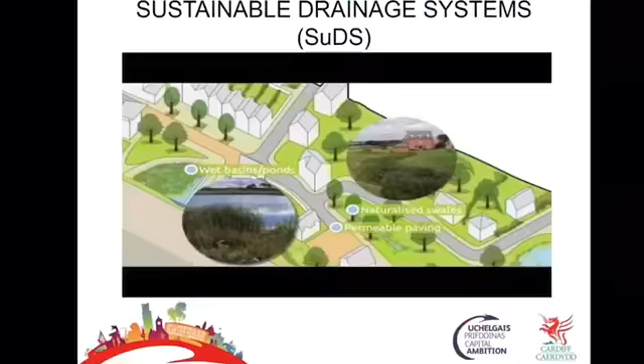Just to explain, I'm a drainage engineer in Cardiff Council. I'm now also a SAB officer, SuDS Approval Body officer, so all applications that trigger SAB legislation in Wales in Cardiff come through me or one or two other colleagues. Because I've got a drainage background, I tend to take on the bigger projects. Here we are. I think I've just jumped 1 or 2 pages.

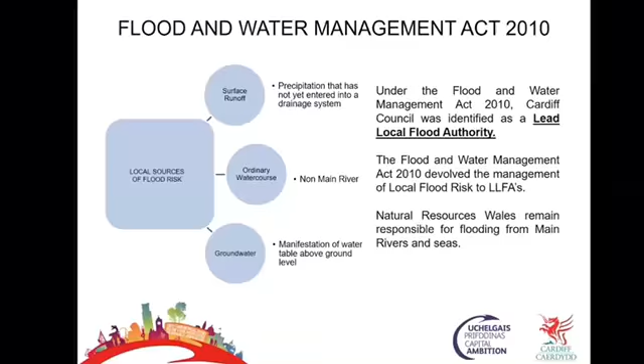Flood and Water Management Act 2010, Schedule 3. As of January 7th last year, we've all been pretty busy in Wales in local authorities. 25 SABs, all councils and 3 national parks. Many are already aware of this. It is a steep learning curve, I think, is a way of phrasing it.

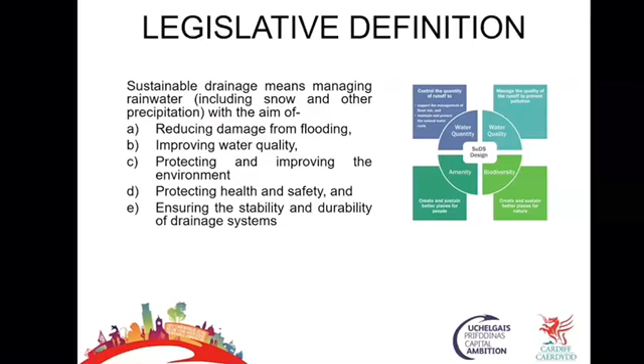Again, legislative definition based on the 4 pillars of SuDS design: reducing flooding, improving quality, delivering amenity, delivering biodiversity, and also ensuring that there's maintenance, ownership, and adoption of the actual facilities. Probably one of the more challenging elements of what we're trying to deal with.

Implementation of Schedule 3, as you say, started last year. Started very quietly, actually. Very few applications in the first 6 months. It's busier now than it was at that time. I think a lot of people were unsure about how the legislation worked, how it would be delivered in each local authority. Very much like planning authorities, there's different interpretation of the legislation. So you probably won't find 2 local authorities doing the same thing.

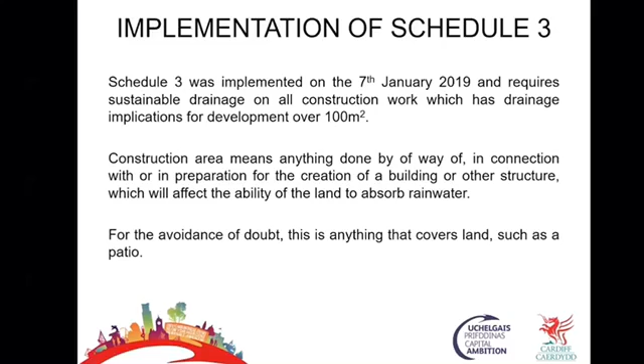What I'll be talking about today is how we're approaching the legislation in Cardiff. It might vary from some other local authorities, but we try and be consistent with the legislation and also try to be reasonable with each application.

What is a SAB? SuDS Approval Body. Basically, it's about 5 of us in Cardiff working in drainage, design and implementation, and any application over 100 square metres where the runoff characteristics have changed within a construction site triggers SAB. It might not be from soft to hard engineering, it's just how the surface water runoff changes, and it has to be over 100 square metres. There are a few exceptions, not many. Trunk roads, Network Rail, some agricultural buildings. Outside that, it catches SAB.

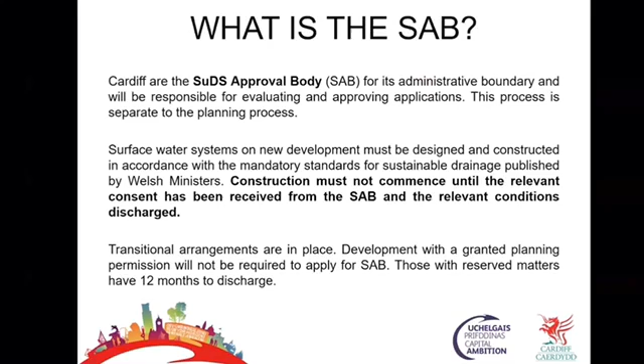The 6 standards were previously mentioned, based on 12 principles. Looking at all these, from my perspective, the most important thing is, have you got an outlet, and what's the difference in level between the invert of your outlet and your finished ground level? That depth, that hydraulic depth, is where all the magic happens. Where the cleansing goes, where the attenuation goes. The bigger that depth, the more you've got to play with.

And the simple rule of thumb is, the longer you keep it on the surface, the cheaper it is. The more you go into ground, particularly on a brownfield site, the more expensive it gets. The one bit of advice we always give to people is get in early, because that's when it's easier and cheaper and quicker to do a design.

One I've got crossed out here, it is in the legislation. Rainwater harvesting tanks. If you've got a high use rate and you're working 7 days a week, go for it. Otherwise, in Cardiff, we don't insist on these, because in reality, you probably won't even make the money back in a year for the maintenance it costs to run one of these things. There isn't a massive rainwater shortage in the area, so maybe that's less of a priority for us.

But at the moment, we can't allow rainwater harvesting tanks to be included as part of attenuation. We have to assume it's full when it rains. So it's a nice thing for BREEAM standards, but unless you have a lot of brown water, grey water use, we don't insist on it. And we certainly wouldn't include it as part of any attenuation figures.

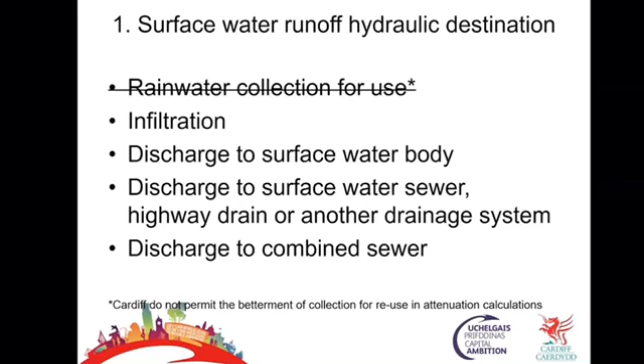Then infiltration, discharge to surface water body, discharge to surface water sewer or highway drain. Final one, discharge to combined sewer. Infiltration in Cardiff, difficult.

That's an important element. 1 in 100 year plus 40% for climate change. That's all about exacerbation of flood risk. In certain instances, I wouldn't insist on that as the SAB officer because the definition is, does it exacerbate flood risk? If, for instance, it went into a water area where there was controlled water, such as the River Taff or into Cardiff Bay, I might consider a lower standard because there's no flood risk downstream.

So again, that's how approaching Cardiff is about being flexible, consistent on the standards, but flexible with each individual site, because it's very, very important. I can't overemphasize this. If a SAB does its job properly, then you get a better design. Don't think it's going to delay things or cost more money. Generally, it speeds things up because there's no drainage conditions in planning. It makes things quicker. And if you get enough on a pre-application, more often than not, it's a little cheaper as well.

So there's an urban myth about SuDS that it takes longer and costs more, only if you get your design wrong. It's really, really important to get in with us early and don't fix the design before you come to us, because that's when it all goes wrong. That's when you start retrofitting with SuDS. That's when it gets expensive.

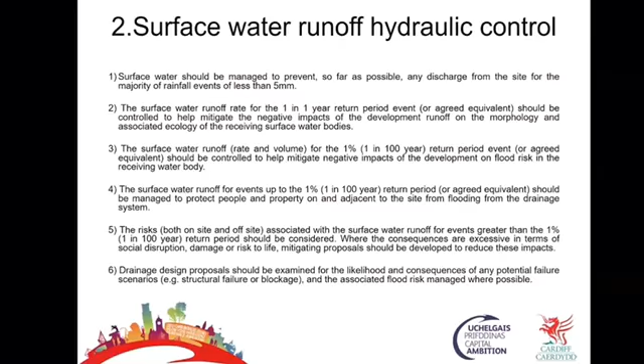Hydraulic control, nature of development, greenfield or brownfield. There is a bit of a let off on a brownfield site. If you've got a brownfield site where the drainage is still working effectively and it's going to the same outlet, we would consider a 30% improvement on that runoff rather than a really, really tight controlled runoff. That is something in the legislation that gives flexibility on brownfield sites. It's not all that common, to be honest, because usually the systems are defunct. So therefore, we consider it as a greenfield site. But it can occasionally happen. And if it does, we'll help developers with that.

Controlling the rate and volume. Often we look at Q-bar. We are starting to reduce the flows going into combined systems now to less than 5 litres a second. We used to have a minimum of 5 in Cardiff. We go down to 2 or 3 now, if it's the only option. The reason being, it's very unlikely to block if you've got an orifice plate that's been filtered through a SuDS system. The likelihood of blockage and maintenance is far reduced. So we are happy to reduce the flow going into the system, knowing that in reality it's unlikely to get blocked. So that's why we've reduced it, and it's something the Water Authority are happy with.

Exceedance flows are really important. If that system overflows, where's the water going? We had floods in Cardiff recently in a housing estate built after the war. The water went straight through 20, 30 houses. It was surface water flooding, no water courses, no rivers, straight rainfall. No systems failed. The reality was they weren't designed for climate change. And that's a problem across the whole of Wales. And we're going to be using SuDS in the next couple of years to try and protect those houses. So where the exceedance flow goes is very, very important.

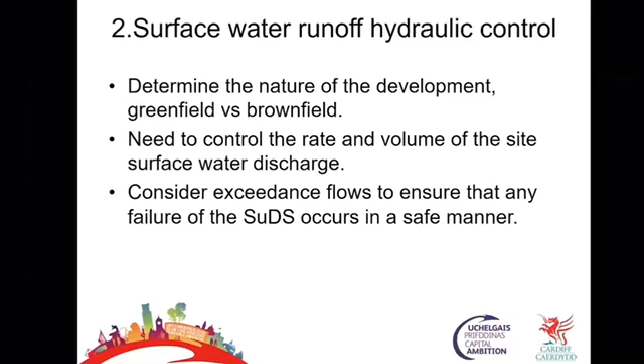Water quality. This is something that's changed in terms of legislation. The SuDS Manual simple index is what we use in terms of simple scoring for what systems you can use in terms of treatment. It's all about highway runoff. 95% of pollution off any site is highway. Roof pollution is easy to deal with. Footpath pollution is easy to deal with. All the pollutants, hydrocarbons, suspended solids, metals, they're all off the highway. How you deal with that and how you maintain dealing with that is really, really important. That's always the area I look for in terms of quality.

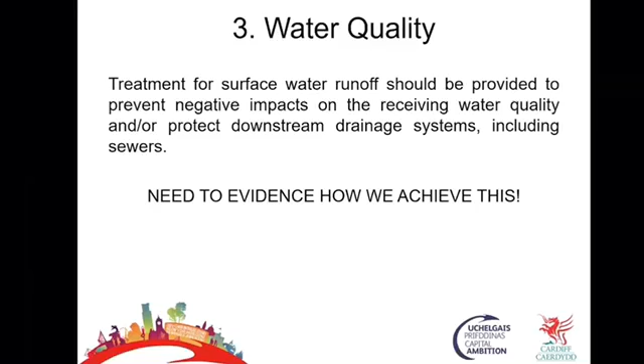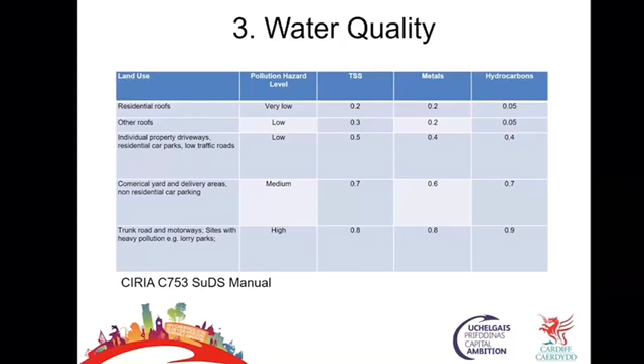This is what I mentioned earlier, the simple index, the scoring. You can find it in the SuDS Manual. We recommend this to everyone and everyone uses it. It's a very simple, easy to understand method of actually managing quality. Gullies are scored 0 here. I kind of agree and disagree with Susdrain on that.

Don't tell Paul Shaffer I said that.

But you can use gullies as part of a SuDS system. So if you had a gully as a silt trap before going into a rain garden, then going into a subsurface box such as Permavoid, etc., we'd be happy with that, because what that would do is hold the heavy solids before it goes into the rain garden. Reduces your maintenance costs.

Have a standard highway gully design, so highways department are happy to clean them out. That's where you would use gullies as part of a SUDS system, where they are very useful. It's about keeping the maintenance low. If the maintenance is high, it won't be maintained. And if we have a SUDS application, SAB application where maintenance is high, I won't pass it. I won't let them build it because I know it won't be maintained.

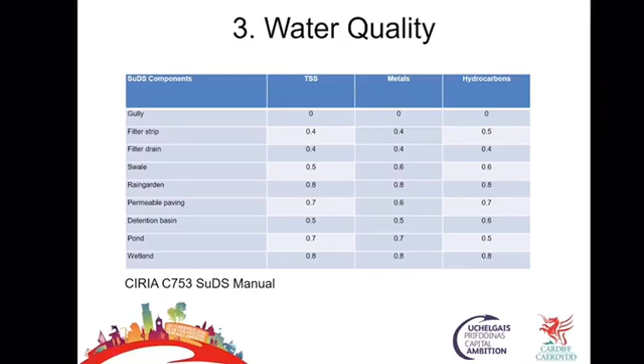Amenity. Very broad definition on amenity. I was telling a colleague yesterday we had a SAB application for a new blast furnace at a steelworks, so you get all sorts. And I did toy with the idea of putting in a rain garden next to the blast furnace. You could have a look when it's working, but I thought probably not. So what we did there, we looked at the overall sites that the applicant owned, and we looked at work we could do away from the application where the construction was going to take place. So it was almost like offset SUDS.

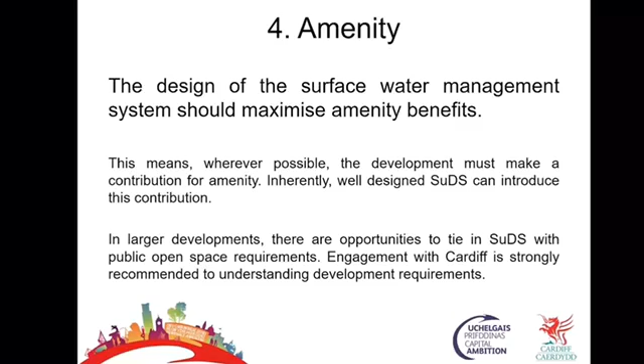So we found out where they sat down and had their lunch away from the blast furnace, created an amenity area there with biodiversity. That's how we were enabled to give SAB approval, and I think we met all the 6 standards. You know, you've got to be reasonable and realistic with what each site can offer. Sometimes it might be offset, but it's got to relate to the sites in question.

Biodiversity, again, this is an area that I'm still learning as an engineer. You have to look at what's there before and what's there after, and it has to be enhanced biodiversity in terms of before and after. That could be trees, but often simple things like reseeding pollinators. You know, a grass bank is monoculture. It doesn't offer a lot.

If you put a much more biodiverse mix of seeds, you can offer a lot more for not a lot of money. And when you're looking at reseeding pollinators, you're looking at really rubbish soil with lots of stones in it. And maintenance, again, is very, very little. It's something councils are learning at the moment in terms of road verges. So certainly biodiversity is an expanding area, but it doesn't have to be expensive.

And combine it with the quality, combine it with the amenity. If you put them all together, it means you're going to keep your development density and meet the 6 standards. If you do them separately, you're wasting space. And I will help developers sometimes to combine those so they can have a more successful development, because you're meeting the standards and it's about better design.

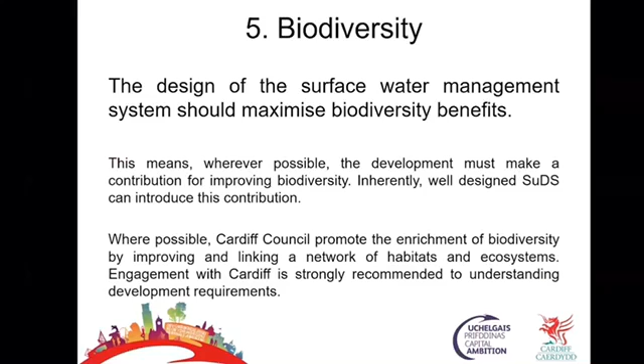Design for construction, operation and maintenance. This is work in progress, I think is how I best describe it. Generally, we have a mandatory obligation to adopt in certain circumstances as a SAB. Often what we find is there'll be a single curtilage, a private developer will take on the maintenance personally, and we'd agree the maintenance schedule and the design. We could adopt, and we are looking at commuted sums in those situations. For small developments, that can be challenging.

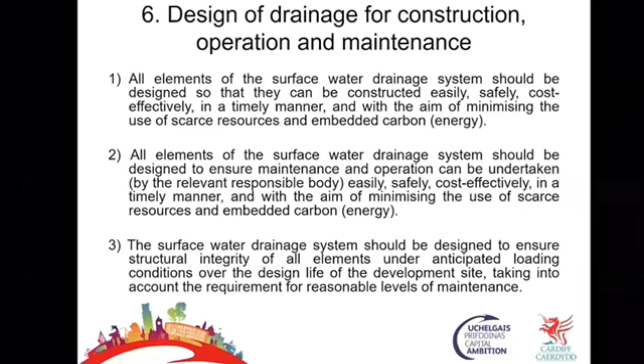For larger developments, often we look at the options for private management companies. Again, that's politically challenging for many local authorities. So that's something we're going through as an authority at the moment, and I know different authorities have different approaches. But the most important thing of all is to get design right, to make sure that maintenance is minimised. That's very, very important. To flick through quickly, the 6 standards again.

Duty to adopt, as I mentioned earlier, we are considering non-performance bonds, because if everything goes wrong as a SAB, we may have to pick up the bill. We can't afford that. We have to make sure we're covered as a SAB on behalf of the local authority. Inspection fees, we will be charging. We will be inspecting when installations take place, and we will be inspecting after as well. That's our role and responsibility. Something that doesn't happen at the moment prior to SAB, and it's always been a concern for us from the drainage section.

Commuted sums and management companies, that can vary between local authorities, and I think it's good to have the flexibility there, because I think it offers the options. It's a political issue for many local authorities, and I think the flexibility is important.

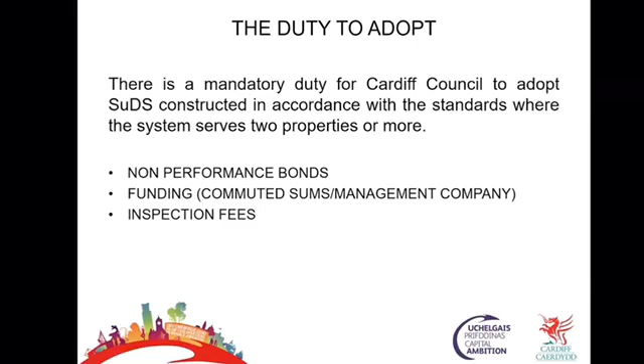So that's why we've got to be careful as a SAB in terms of any decisions we make. I think we've got to be seen to be reasonable to try and avoid these situations. But at the end of the day, we do have powers to enforce, up to the ultimate of turning it back to the original site conditions, which we don't want to do, but we can and will if we have to. If some applicants completely ignore what we say and completely ignore the statutory legislation, we will act on it in Cardiff, because we have to, because we're the capital city and we've got a responsibility. So hopefully you never get to that situation, because no one wins in that situation.

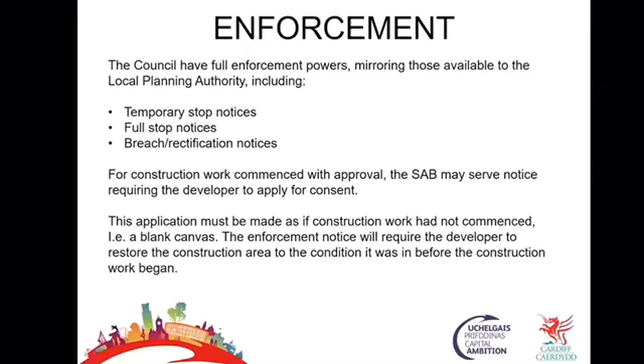And then what I generally do is have a few more conversations after that pre-app meeting, prior to them putting the SAB application in, to be sure there are absolutely no problems, and any tweaks we have to make would be minor and wouldn't affect the SAB application. But the most important thing is to get in early. Don't come to me with a fixed design that's already gone into planning. That's an absolute nightmare, because I have to come in with a retrofit design, and there's a really good chance it won't pass SAB and it won't get built, and it'll have to go to planning again under a new application. I really want to avoid that. It does happen, unfortunately, but hopefully less and less as the more people understand what the legislation means in Wales.

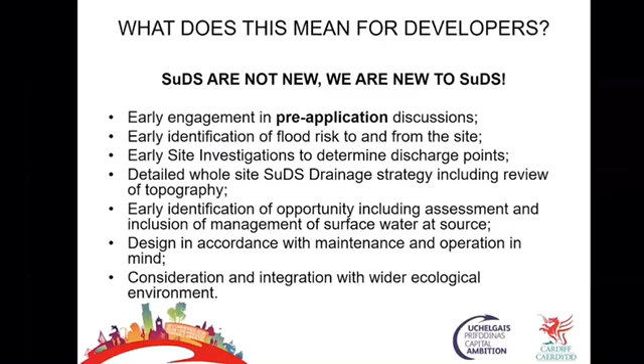It's the hardest one to deliver because Mother Nature decides where and when it falls. But more often than not, it's done at the end instead of the beginning. This legislation is all about doing surface water at the beginning rather than at the end of the development. It's as simple as that, and don't make it more complicated than it is. It just makes lives easier and leads to better design.

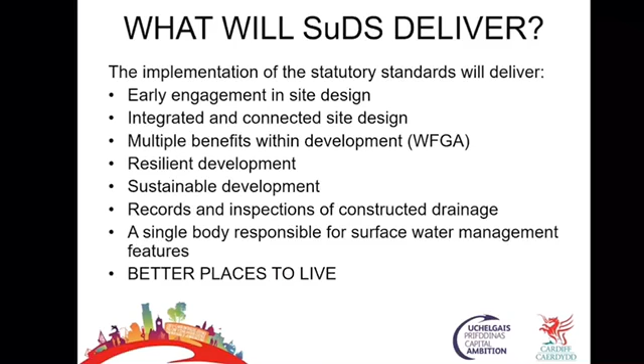A final mention, we will be publishing a guide in Cardiff. We keep amending it all the time as we're learning, particularly for small developments where it's difficult to employ an architect and a designer to turn over a small development, because the architects might not necessarily have the background to understand the legislation. We will be publishing it soon to try and help particularly small developers and give more consistency as to how Cardiff approaches the legislation. That's it.